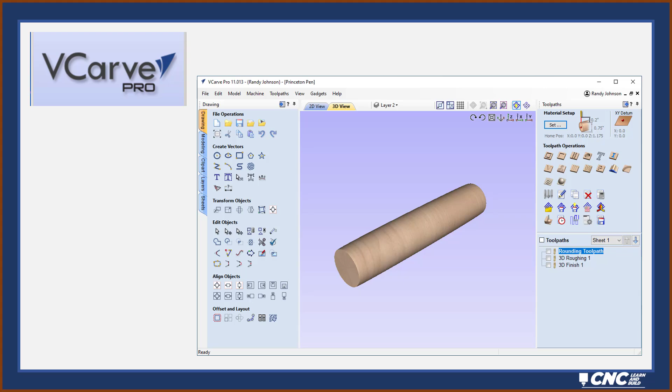But the first thing I need to do is to set up the pen barrel model within VCarve. Now this pen barrel model can be adapted for almost any pen blank out there, just by changing some of the dimensions. The first thing you need is to get your pen kit, your bushings, and your pen blank together, because the pen barrel tube and the pen blank and bushings, there's some dimensions here you'll need for setting up your VCarve setup. Within the job setup window, of course, we're going to be using rotary today.

And the length of the job size, you'll match that to the length of the pen barrel. In this case, that's 2.21. The diameter of the job, I typically set that up slightly smaller than the dimensions of my pen blank. So in this case, it's 0.7, where my pen blank is 0.75. It also gives me plenty of material after it's rounded, because most pens are a 1/2 inch or less or thereabouts.

For the Z zero position, I like to put that at the center of the axis because that's very repeatable and very consistent. And then also I use an XY datum in the center location as well. For the mini 4th axis on my HD5, I like to set it up in the X-axis for pen making. It just allows me to watch the action better, and it's a simple setup.

However, depending on your machine, you can also set that up in the Y-axis. If you do have that checkbox called Flip Design, it actually allows you to toggle between the X and the Y axis and automatically flips your design. So again, depending on your setup, that's one other option available to you.

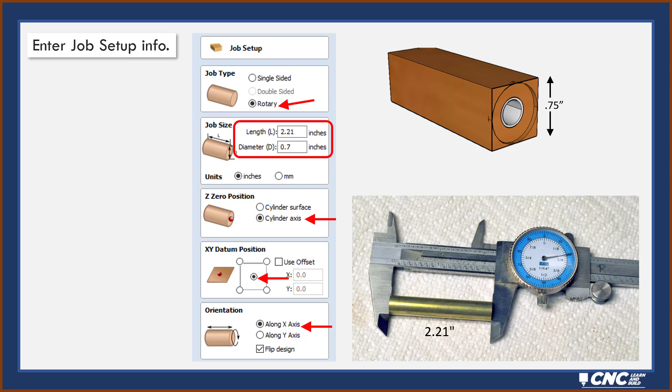Within the VCarve window, I've already entered some information here. You've seen here where I have drawn a cross-section or a profile of the pen barrel as well as the bushings. I'll pull the dimensions for the bushings right off the instructions that come with the pen. We'll take a look at those closer later. But the pen bushing in this case is 0.47.

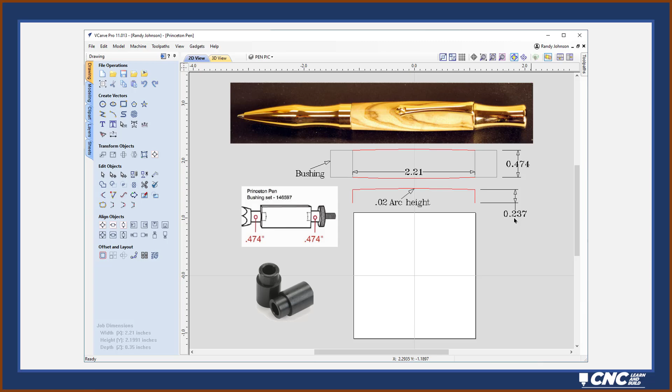I've also drawn a 1/2 profile of the pen barrel and drawn in a little arc here of 0.02. And then the 0.237 over here at the right side represents 1/2 the dimension of the bushing, or 1/2 the diameter of the bushing. First thing I need to do is to bring in an existing model or create the model for this. Now here's a little tip and trick.

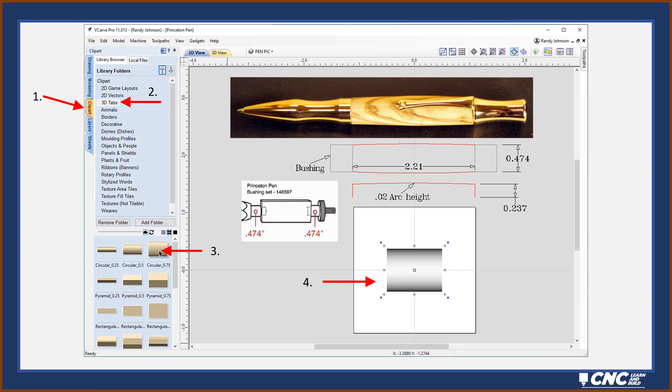I'm actually able to use the 3D tab right out of the clip art window and use that as a starting point. So this circular 3D tab, the 3/4 inch one, I double click on that, and that inserts it into my job setup area, my drawing area. I need to rotate it, and I'm going to click the 9 key a couple of times to rotate that up in the vertical position.

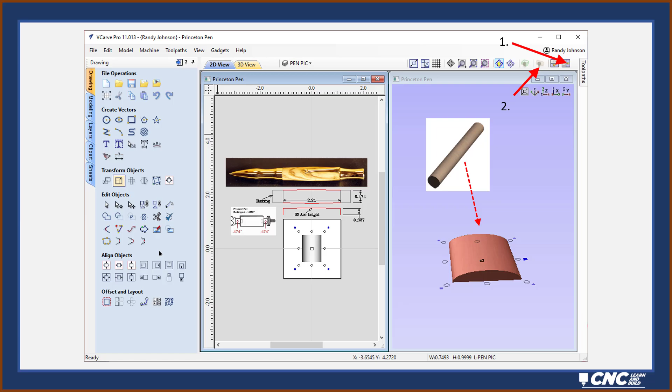And now I want to split my windows so I can see what's going on in both the 3D and 2D window. And you can do that in the upper right corner. I'm also going to switch from the wrapped or round view in my 3D window to the flat view. So the red model that you see there in the lower right, that's actually this 3D model in the flat view.

Next up, I want to start sizing this 3D model to fit my job setup area. So I'm going to open up my set size window, set the anchor point to the middle, and then for the width in the model or the job size, I'm going to use the 2.21, which is the length of the barrel, enter that into the width, and then click apply. You'll notice in the 2D window and the 3D window how that model has now stretched out to the width of my job setup.

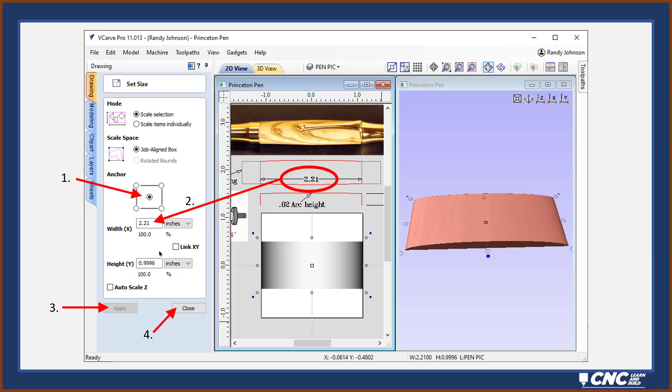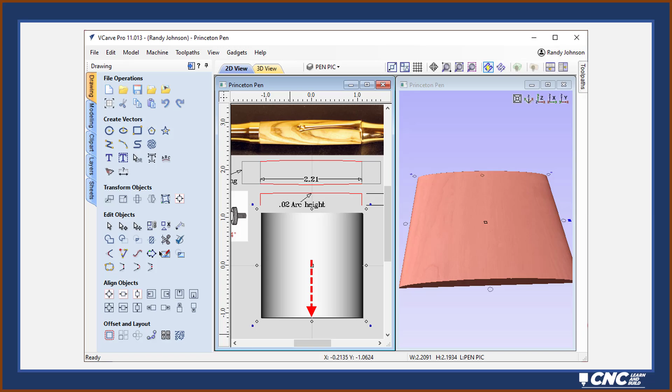I want to stretch the model to the top and bottom of the job setup. First, I want to make sure that my snaps are active in the top of my work area. Then I'm going to grab that handle in the middle of the top of the 3D model in the 2D window and stretch it up till it snaps to the top of the area, then stretch it down till it snaps to the bottom. You can see in the 3D window on the right how the model is now full size, covering our entire job setup window.

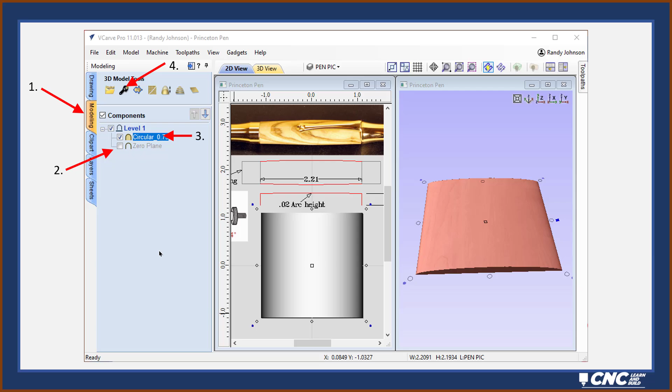Next up, I'm going to switch over to the modeling window because I need to make some adjustments to this model. You'll sometimes have the zero plane automatically active, so if it's on or visible, just turn it off. We won't need the zero plane for this setup. Then select the model, number 3 right there, go ahead and select the circular tab so that's active, then select the wrench at the top to open up the component window.

This is where we're going to set the arc height by entering that into the shape height. When you enter that in, you'll notice on the right side how the 3D model is now very shallow, or very low profile, with a very slight arc to it. And that's the arc of our curve.

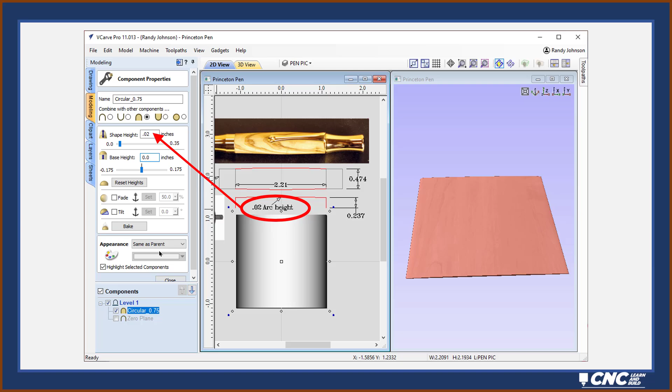But we still need to add some base height to this, and for that we'll use the radius of the bushing, or half the diameter of it. I like to add a little extra to this for a couple of reasons - it makes the pen barrel a little oversized for sanding, and it also keeps the router bit from touching the pen bushings during machining. So I just add a little extra in and enter that into the base height. You'll notice on the right side now how we have a slight arc at the top of this 3D model, and then the base height or foundation below it. That'll give us our 3D model for this pen.

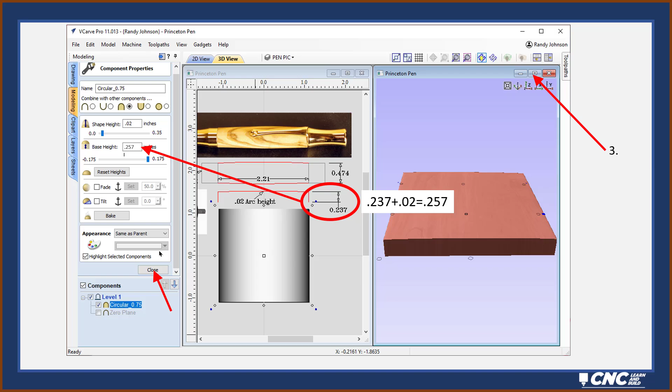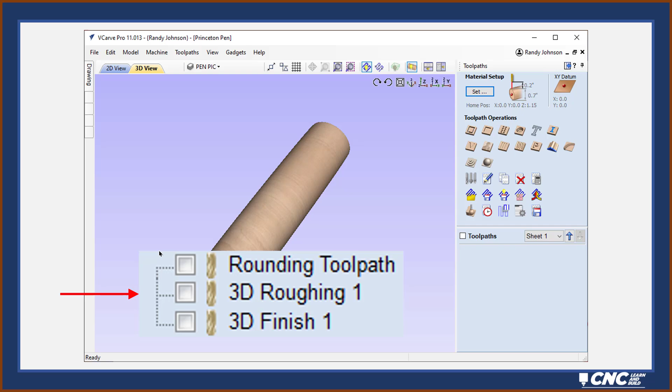Close out of that window. I'm going to switch back to the wrapped, or round, view of the 3D window and open up my toolpath window because we're now ready to set up our toolpaths. For this basic pen model, we'll need 3 toolpaths: a rounding toolpath to take the square stock down to round, and then a 3D roughing and a 3D finishing toolpath. The 3D roughing toolpath will rough it down, leaving us a little bit of material to take off with the 3D finishing toolpath.

So in VCarve Pro or Aspire, you could use the gadget window and use the create rounding toolpath. Now if you have VCarve Desktop, gadgets are not available to you, so check in the description below this video - I've included a link there to another resource for how to create a rounding toolpath within VCarve Desktop.

It's a little bit of a workaround, not quite as easy as using this gadget, but it gets the job done, and everything else I'm showing here you can still do in VCarve Desktop except for this one step. So check that out if you've got VCarve Desktop. If you want to upgrade to VCarve, this is obviously one good reason to do that, but it's not an absolute requirement - you can still create your pens within VCarve Desktop. You just have to go about the rounding toolpath a little differently.

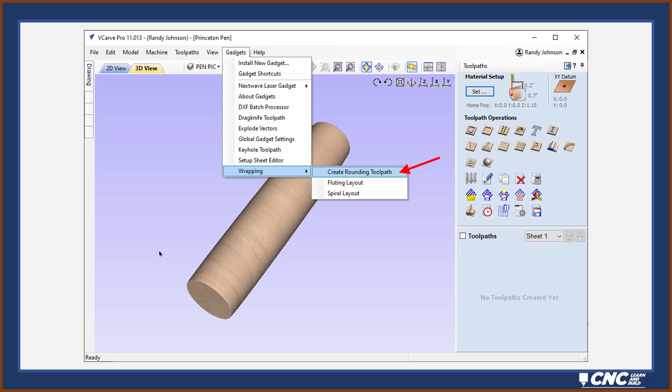But if you have VCarve Pro or Aspire, go ahead and click on Create Rounding Toolpath Gadget, which will open up the gadget window. Since we're using square stock, we need to select that option at the top and enter the dimensions for that square stock. Next, we're going to use the optimized raster because we want to knock the corners off of our square stock. For this setup, we also do not need to enter any allowance, because we're going to be taking this round cylinder down even further for our 3D model for our actual pen barrel. So leaving that at 0 works just fine.

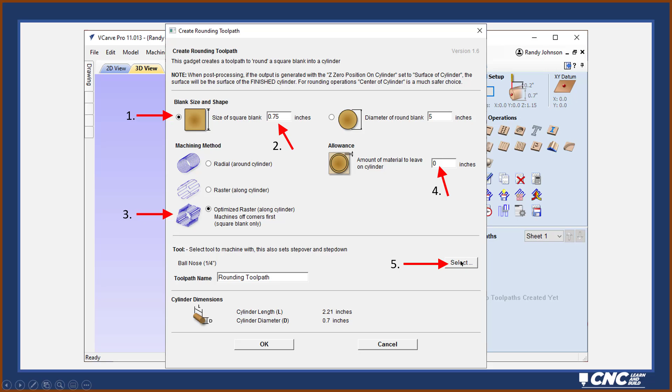However, we do need to select a tool for this setup, so click on Select - that'll open up your tool database. Now I like to use a 1/4 inch ball nose for all 3 toolpaths, that way I can save them together and run them together. For this rounding toolpath we're setting up now, I'm going to change out the pass depth to 0.025, a fairly shallow pass depth.

Set the step over to 30%. I'm using a spindle, so I'm going to set that to 20,000, a feed rate and plunge rate of 120. If you have a different setup, you may need to adjust these up or down to fit your particular setup. I then click on Apply down the bottom and select to bring it into my gadget window.

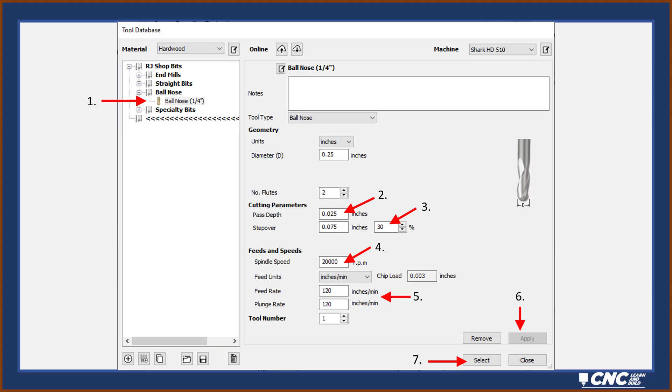This ball nose bit is now listed there in the gadget window, as well as the name that it's going to give this tool path. You can change this, but I usually just leave it as rounding tool path because I know what that means.

If you check at the bottom, you'll notice how the cylinder length and the diameter, this information comes right over from your job setup. So the length is the same as your barrel, the tube for the pen, and the 0.7 is the diameter of our job setup. So this rounding tool path is going to take the square stock down to this 0.7 inch diameter, and from there we'll machine it down further for our final pen.

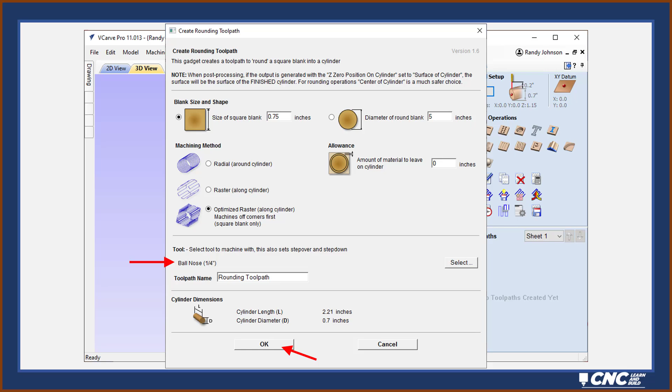We click OK to exit this. We now see the toolpath listed on the right side, and you can see the blue lines in the middle here show us how this toolpath is going to knock the corners off of our square stock.

Next, we want to select the 3D roughing toolpath, open up that window, and select the same ball nose bit that we used in the previous toolpath. You don't have to make any changes, just select it and bring that into the rough machining toolpath here at the top. Next, for the machining limit boundary, we're going to set it to the model boundary.

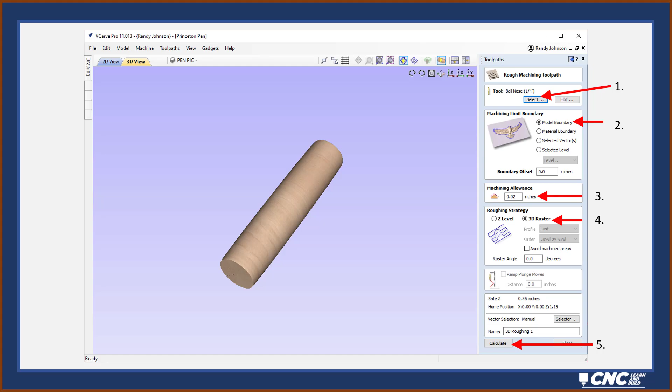We are going to add a little allowance here because we want to leave a little bit of material for the 3D finishing toolpath to take off. I'm going to set it up at a raster, and that way it'll go along the length of the barrel, which would be a very efficient setup. And then I'm going to click Calculate to calculate this toolpath.

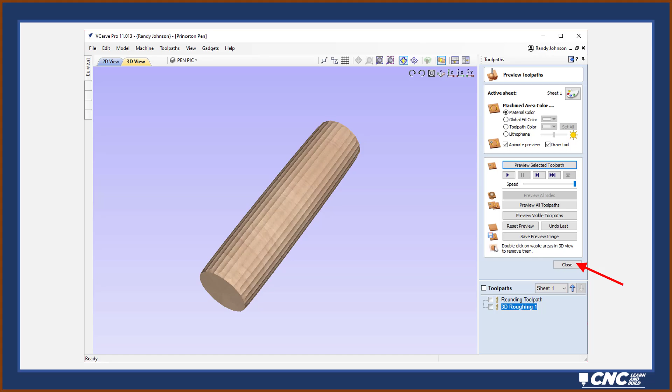Now see how this toolpath looks a little different than the previous one. We can preview it, and that's what the stock will look like after it has run the 3D roughing toolpath. The grooves that you see there are because of the 30% step over. These will then be removed once we run the 3D finishing toolpath, which is the next one that you want to select from your toolpath window.

Again, you're going to select the same 1/4 inch ball nose bit and insert that in at the top. However, next you want to click on the edit window, that little edit button on the right side. This will allow you to edit the setup just for this occurrence of this 1/4 inch bit.

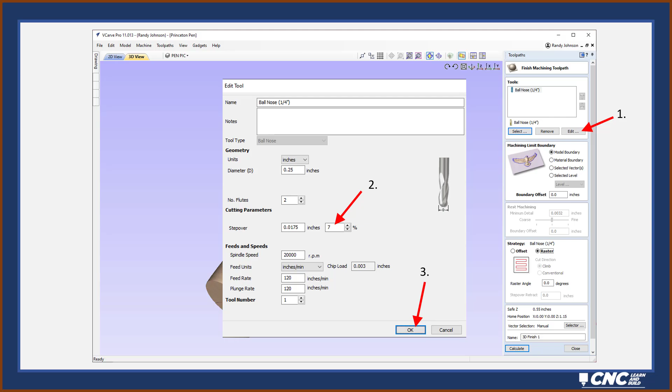The only change you need to make is changing the step over to 7%. We want a nice tight step over so we get a nice close, smooth finish on the pen barrel when it finishes off. Click OK, and then go ahead and use the same settings for the model boundary and the raster that we used on the roughing, and click Calculate.

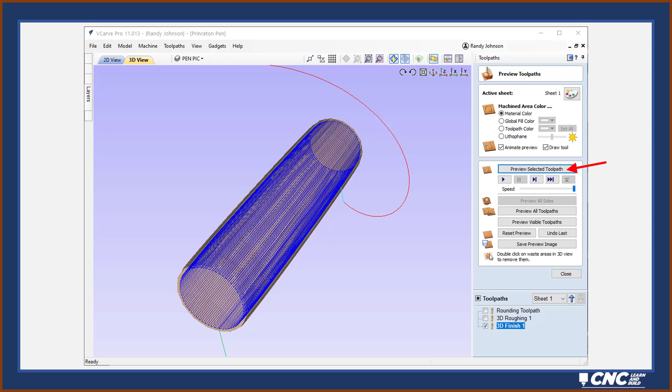We now see that the blue lines representing the toolpath lines are very close together because it's going to give a nice tight toolpathing to give us a nice smooth finish. And of course we can preview that, and this is what a simulation of what the final barrel will look like, with a slight arc to it.

We close out of that, and we're actually ready to save our toolpath. So click on the save icon. That will open up the save window.

Since we're going to save all 3 of these together, you could use the middle option at the top and then check all the boxes by all 3 toolpaths. That way they will all be saved out into one TAP file or one G-code file, which you can then save out to your thumb drive and take to your pendant to run the toolpaths.

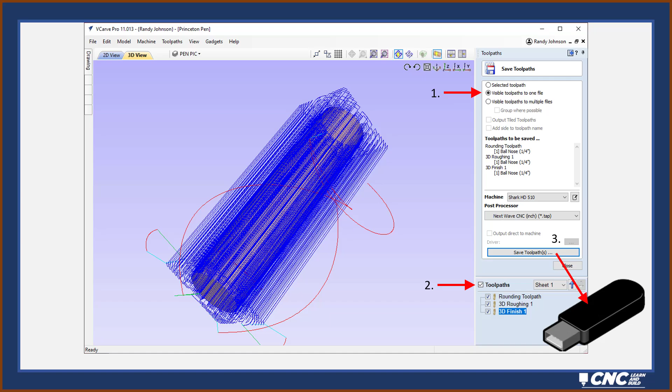From here, we now need to turn our attention towards prepping the material. And for that, I recommend, as I mentioned earlier, there are instructions available for all the different pens. These are readily available for download online from the various pen distributors and retail stores where you buy your pen kits.

They're very nice because they give you all the really important information about the diameter of the drill bit, the diameter of the blank, the diameter of the bushings that are required, as well as some assembly instructions. So there's lots of helpful information on this. Go ahead and download that, read through that as you prep your material.

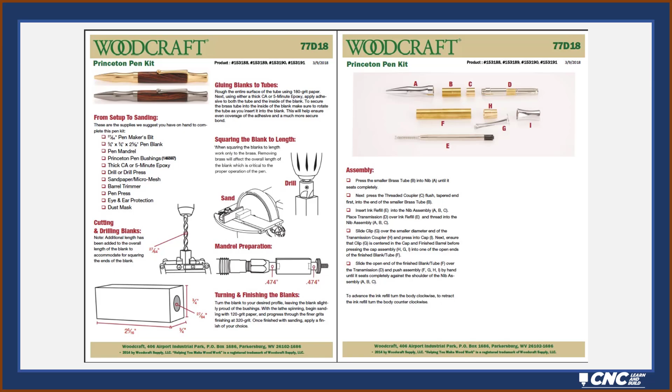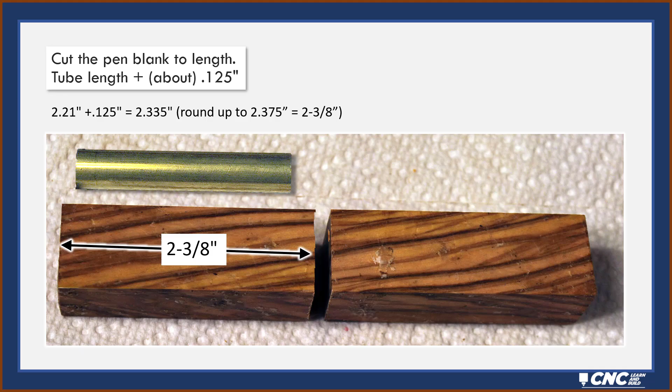But the first step in prepping the material is you're going to cut your pen blank material to length, and it's typically cut a little longer than the brass tube that you're going to use for your pen kit. I often will just round it up to some even dimension. It's not real critical, you just want it to be a little bit longer.

The next step is you need to bore out the center of that pen blank with a drill. The drill bit diameter will be specific to your pen kit, and that'll be specified in the pen instruction worksheet as well. Depending on what setup you have, if you don't have a good way to hold your pen blank vertical, I find that this centering drilling jig works really well, and I just have it set up with this little drill press dedicated to this purpose.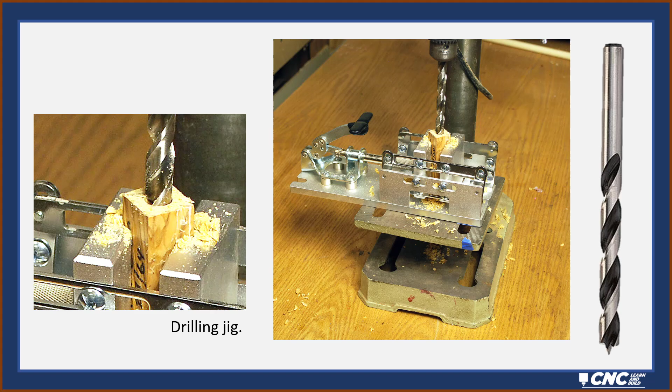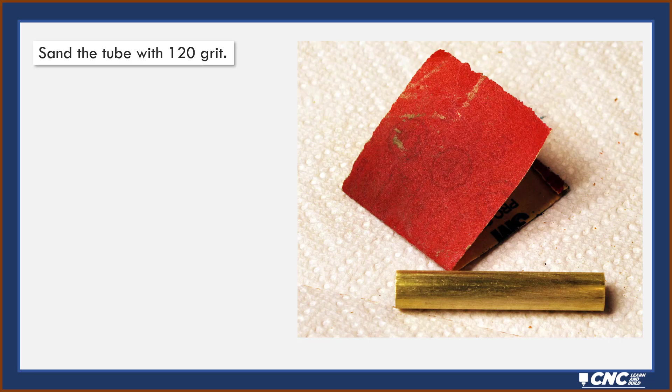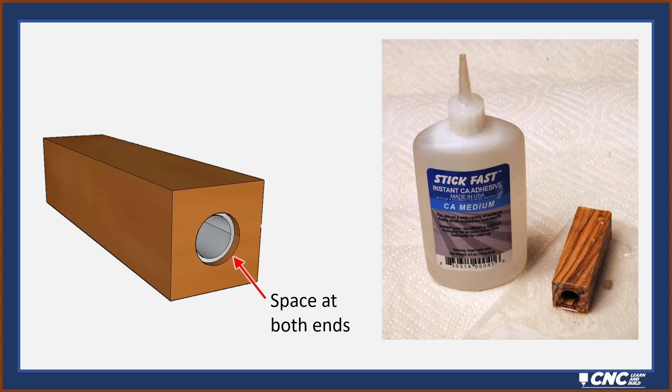You test fit the tube just to make sure there's no places where it's going to hang up inside, and then you want to prep the tube by sanding it to get any tarnish or oxidation off the surface in preparation for gluing. CA glue is a very common glue to use when you're gluing your tube into a wood block. Epoxy is another option, and you want to leave a little space on both ends just to make sure that tube is centered inside that blank.

After the glue has dried, you want to flush trim the end of your wooden block, your pen blank, flush with that brass tube. There's a couple ways that it can be done.

These accessories are available from pen distributors: the reamer and the centering shaft that goes down inside the barrel, and then the counterbore attachment. That counterbore attachment, you just want to run down until it just touches the brass. The centering shaft or reamer in the middle has a couple functions. One, it holds the counterbore square with the end of the brass tube, and then the reamer also removes any glue from inside the tube if there's a drip of glue inside there. So it's a nice setup.

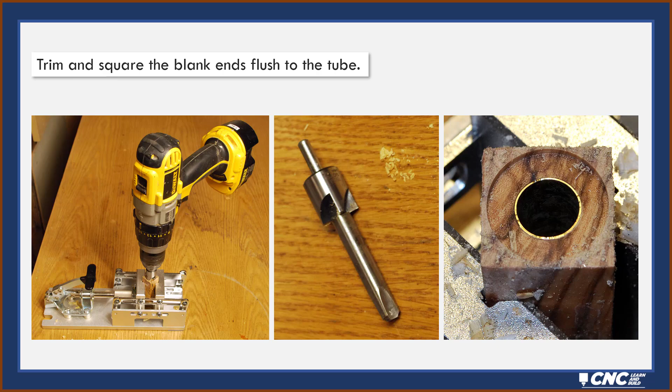And again, these will come in different sizes depending on your pen kit. Another option is you can also take your pen blank to a disc sander with a miter gauge and sand it up as well. If you don't have any concerns about there being glue inside, then that approach works really well also.

Now ready to go ahead and insert your bushings inside the barrel. This setup, as you see here, is what's going to be mounted onto the mandrel. I mentioned earlier how I use a number 2 Morse taper mandrel. This setup works really well on the mini 4th axis because it just fits right into the headstock.

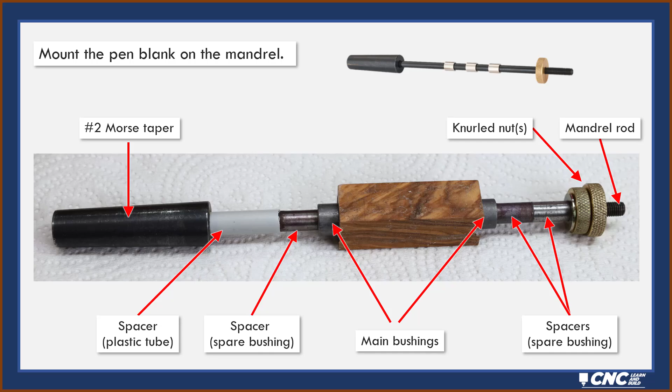I could use some spare bushings and a plastic tube for spacers, and then a couple of knurled nuts on the end. Now most mandrels come only with a single knurled nut, but I have found that because the CNC rotates back and forth, that single knurled nut tends to come loose. So I put a second knurled nut from another mandrel that I have, and it acts as a lock nut. I tighten it down really tight because you want that to be really snug on there, because the end pressure is the only thing keeping that block of wood from rotating on the mandrel shaft. That's why that heavy compression from the ends will keep that nice and tight.

Then mount that into the headstock of your rotary tool. In this case, I have also extended the center point on my tailstock quite a ways. The reason I've done that is so that when I'm done turning, I can slide that center point back into my tailstock, and I can pull out my pen mandrel with the Morse taper and it clears the tailstock. So I don't have to move my tailstock out of position. It allows me to get into a routine of loading up pen blanks, sliding them in, turning them, pulling them out, putting on a new one, and I get into a little production situation while I'm turning it, and all the setup of my mini 4th axis headstock and my tailstock just remain stationary.

Of course, just like with any CNC setup, you need to zero out the Z. And since the Z is set to the center of the material, you obviously can't reach the center of the material with the tip of your bit. So what I like to do is I put the bit down to the top of the center point on the tailstock, and since the center shaft there is a 1/2 inch diameter, I know that the top of that is a 1/4 inch above my Z0. So then I manually set my pendant to 0.25 for the Z, and that's the same as zeroing the Z out to the center of my pen blank.

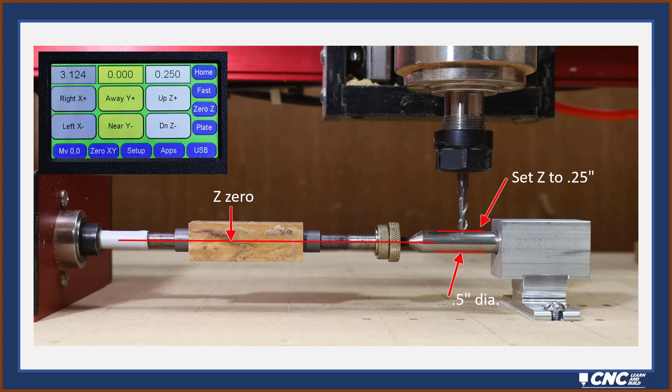After I've done that, then I switch and I go ahead and zero out the X to the middle of the material. That is the pencil mark you see there in the middle for the X. Now my Y0 is centered out to the middle of my shaft between the headstock and the tailstock. And that's something I set up when I assemble my mini 4th axis on top of my table.

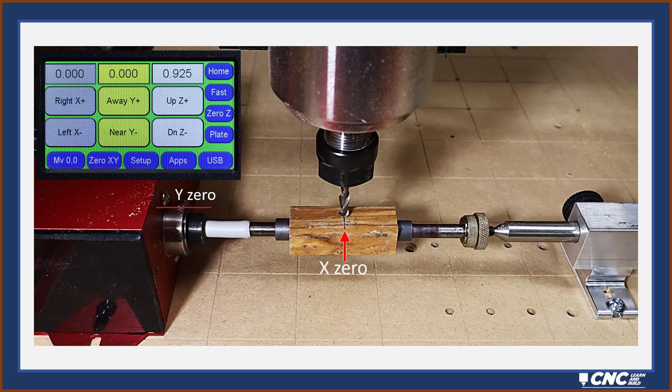And so with this setup, these 3 zero points of the Y, the X, and the Z, when I change out to a different pen design, the only one I have to reset is the X0, because my pen blank is a little different. If I'm making a whole bunch of the same pens, I don't even have to re-zero that one. But the Y and the Z, as long as you're running a set of pens, those don't change. Just the X0 if you have a new design. So it becomes very convenient to run a series of pens on the mini 4th axis with this type of setup.

So we're ready to run the toolpath. And of course, we're going to run them all together. So the first one that's going to automatically run will be the rounding toolpath. And that's going to take the square stock down to a round cylinder. That's where it gets its name, rounding toolpath. And so what we have here now is a 0.7 inch diameter round cylinder.

The next one that'll run after that will be the 3D roughing that we saw earlier. And that starts to give our pen some shape, takes it down in diameter. Still a rough finish because it's just the rough toolpath. And we'll finish it off with the 3D finishing toolpath to the final diameter.

Now you can see there it's slightly oversized over the bushing. I do that intentionally for a couple of reasons. It's going to be a little sanding space when I get it to the sanding stage, but I try to avoid having the router bit hit the bushings, and that's why I give myself a little bit of clearance.

Another tip here is that once you get used to this setup, you can actually run undersized bushings. You don't need to run the actual size bushing. And when you run an undersized bushing, then you have lots of clearance to prevent the bit from touching the bushing. So there's a couple options to work with. When you run a few pens, you realize how you can get by.

Unlike wood turning lathes, the bushings really only play the role of holding this pen part in place. On a woodworking lathe, they're actually used to size it at the ends, but you're not relying on it in this case because the router bit is programmed to do the curve. Again, if you're unfamiliar with pen turning, this will sound new to you, but if you've done some pen turning, I think you'll understand what I'm talking about.

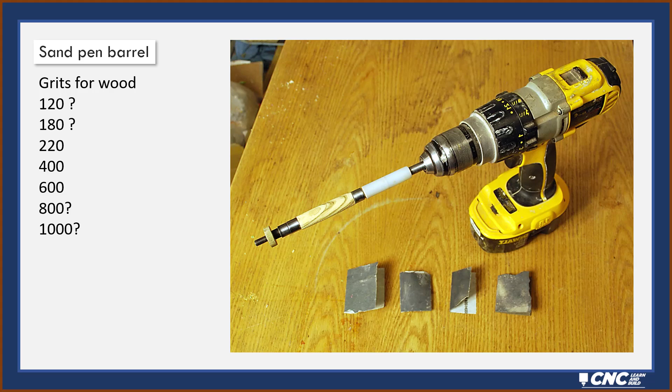So what I usually do is I'll unmount it and put it onto another pen mandrel, and I chuck it up in my drill. I just have a little sanding station set up for this, where I've got a pen mandrel in my drill, put the blank on it, and then I use various grits of sandpaper. I usually find I'm running between 220 and 600 for most of my setups, but depending on the material and the finish that I want, I may drop down to 120 and all the way up to 1,000 or more. But this works pretty well as opposed to trying to do it on the CNC rotary.

Of course, it's a good idea to clean off any dirt or dust prior to finishing it. In this case, I'm using a rub-on lacquer finish, which I like because it's easy to use, it's quick, I can put multiple coats on, and I can get different levels of sheen from a satin finish all the way up to a gloss finish. Another really popular finish is straight up CA glue. It's a little trickier to use, but it gives you a very glass-like finish, and it's absolutely beautiful. Lots of finish options out there. These are just a couple of them.

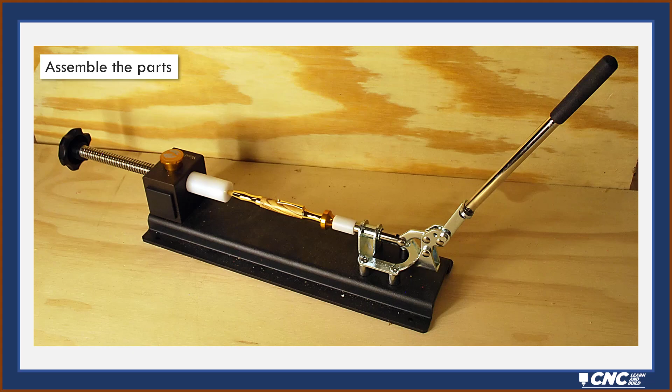Of course, you're going to use your pen press then to put the pen together, and you've got your pen. Now, this pen barrel that I have shown you here is your basic pen barrel, just a simple, smooth pen barrel, the same thing you'd get off a woodworking lathe. Takes about 15 minutes to turn it on the CNC. You could probably do it quicker on your woodworking lathe. However, once you have this basic pen barrel, you can then change the specs of it for different types of pen kits.

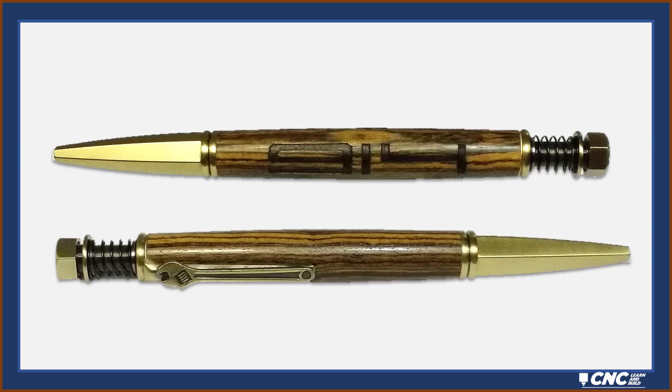But you can also embellish it very easily using VCarve or Aspire. You could very easily add flutes to it with a simple straight line fluting bit. You could do cross hatching. You could do VCarve engraving. All available within VCarve or Aspire, including VCarve Desktop. You could do all these embellishments.